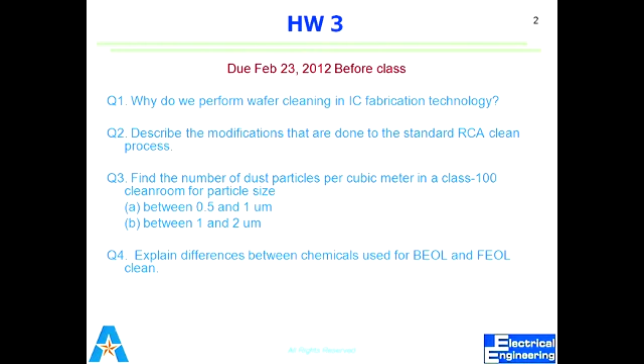In cleaning, the first rule, the AAA rule, as I told you in the lab, is that you always add acid. Always add acid is a very important rule for the cleaning process. Whenever you need to prepare a solution for cleaning, and one of the components is acid, you always add acid, so acid always goes at the end of the process. Keep in mind that you never add something to the acid, but always add acid to the other chemicals.

So there are actually two steps of the cleaning process. One is named FEOL, front end of line cleaning process, and the other is named back end of line cleaning, BEOL. As the name illustrates to a certain extent, front end of line means starting from the silicon wafer to the process where the first metallic deposition comes into account.

When you deposit the first metallic layer, make the first electrical connections, or maybe a bonding wire or metallic deposition, so before depositing the metallic layer on your device, the cleaning from the beginning to that step is included in the front end of line. After the metallic deposition, the back end of line cleaning process actually starts.

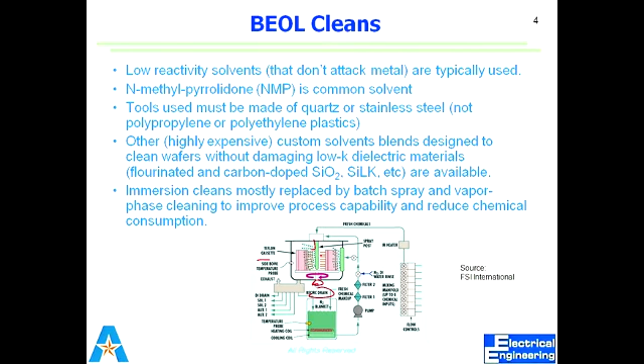One example of a back end of line cleanup process is a solvent clean. So in solvent cleanup, first of all we clean it in acetone, then in IPA, that is isopropyl alcohol, or maybe methanol, or even you can use all three of them as well. Then we rinse in DI water, then dry with nitrogen, so it removes the organics.

If somebody among you has been working with functionalizing the surface, means you are working with maybe DNA or RNA or some other things like that, you have observed that for the cleaning process, you follow this protocol. You spray acetone, then you spray IPA, and then DI water.

Mostly you repeat this process 2 to 3 times, so that you make sure that the surface is clean and you have not damaged anything. So they are not very highly reactive chemicals that we are using. It's just an example of organic cleanup in the back end of line process.

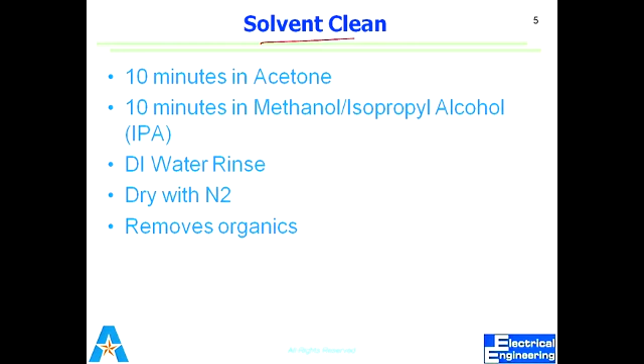Okay, as discussed in the lab as well, the piranha clean is mostly used for removing the photoresist residues, if you remember. The strips of photoresist need to be cleaned; this is one of the very critical steps when you are cleaning. You need to make sure that there's no photoresist residue.

Because when you are fabricating a device, it may happen that you are spinning the photoresist, you're patterning your film, and again you need to pattern another layer of some other material. So you spin the photoresist again, and it may happen again and again.

So that's why you need to make sure that before you deposit the next layer, you clean the surface and there are no photoresist residues from the previous photolithography process. So photoresist residues need to be removed. When do photoresist residues need to be taken into consideration?

After the etching process. Whenever you etch some surface, it means that you are actually patterning the surface, because photolithography plus etching is one way of patterning a thin layer. Do you know about the lift-off process or no? What is lift-off? Because I was talking about etching, I believe when you know about photolithography and etching, you should know about lift-off as well.

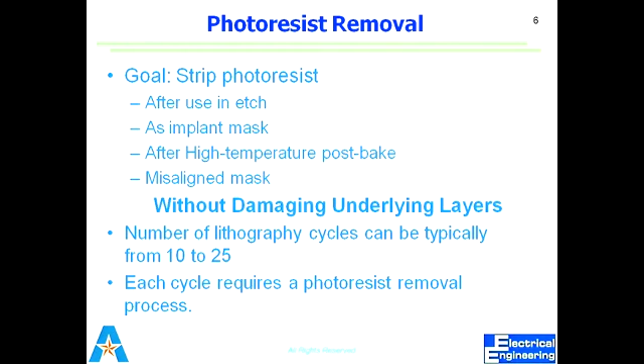Okay, so there are different types of photoresist removal. First is the oxidizing type. In this case, commonly named piranha solution. Different ratios of this sulfuric acid and H2O2 are used. Here H2O2 is actually the oxidizing agent. That is, it oxidizes the carbon in that photoresist to form carbon dioxide, and that escapes. And that's why it's easier to remove the photoresist if there are any photoresist residues.

But as I told you before, piranha solution cannot be used as an organic cleanup or for photoresist residue removal when you have a metallic layer. So it can only be used in the front end of line cleaning process, not in the back end of line cleaning process. Once you have a metal on the surface, you cannot use this piranha clean because it will damage your metallic layer. In the lab we use 3:1 if you remember for this piranha clean,

but some people use 7:3 as well, where H2SO4 is 7 and H2O2 is 3. So that's why I say different ratios are used for piranha clean, but even 1:1 is used. That's also good enough. Maybe you will have to heat it up. 3:1 is very hot, and 1:1 would not be, but you will have to heat it up to 95 to 180 centigrade before cleaning.

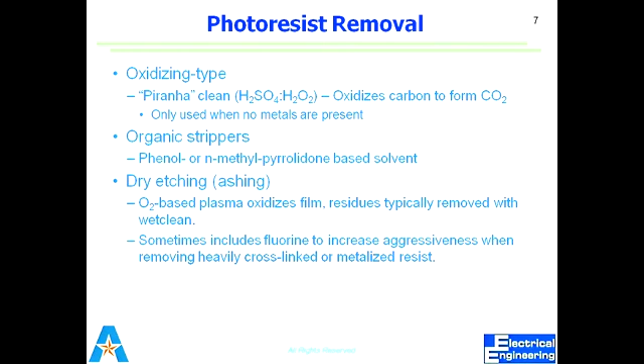Okay, so we are talking about dry etching. As I told you, oxygen or fluorine can be introduced as a reactive species when we are doing dry etching. What is the effect of oxygen and fluorine? They can increase the etching process. How they increase it is why you need to know about the H/C ratio and F/C ratio. Right now I am not going to talk about that, but you should know that adding fluorine or oxygen actually affects your etch rate in dry etching.

Do they act as a catalyst? Yes, that's why I say the important thing is actually the F/C ratio. Adding fluorine increases the F/C ratio, adding oxygen increases the F/C ratio. So this is the factor that is affected. When you talk about dry etching, you should know the F/C ratio and how it affects things, and you will see that the F/C ratio works differently for silicon and silicon dioxide. Because today we are talking about cleaning, not dry etching, I don't want to get into details. But when you talk about dry etching, you should ask the question about F/C.

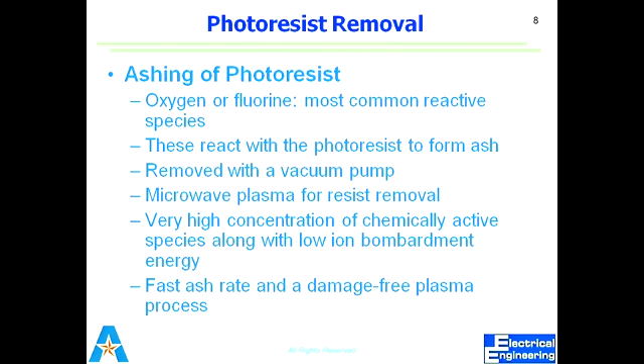Because for etching one material, you may have two to three gases available, but one gas reacts faster than the other. So the etch rate of every gas is different. So those are the three to four parameters you need to keep in mind when working with the dry etching process: the time, the concentration, the etch rate, and the energy or RF power. Yes, that is the power.

But you have good controls, and dry etching is a very simple process. You control which gases you introduce and the concentration or power of the gas. You can even use a mixture of two gases to remove any surface during the dry etching process.

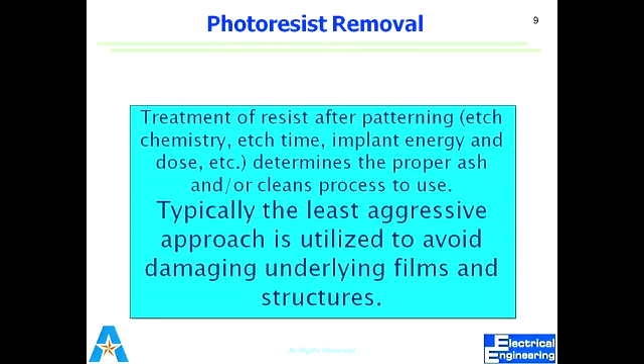Okay, because we are basically discussing the cleanup process, dry etching is also one of the processes used to clean the surface. As I told you, oxygen plasma is a very commonly known process to clean the wafer surface. The other ways we can clean the surface are named vibrational methods. We can use ultrasonic or megasonic waves.

With ultrasonic waves, in a liquid, which may be DI water or H2O2, we produce high energy sound waves. Due to those waves, bubbles form and immediately collapse. When the bubble collapses, you get a liquid-free space or cavity. So when the bubble forms and immediately collapses, there is a cavity.

Okay, so in this way, with the vibrations, you form and collapse bubbles, named cavitation bubbles. That cavitation is actually the process that makes the wafer surface clean. We don't touch the surface. Keep in mind that liquid is there.

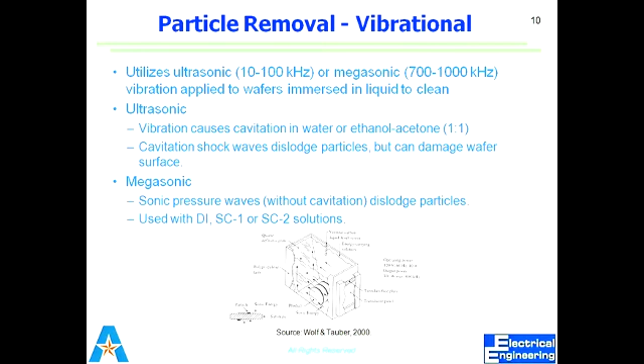After the vibrational process, there is another process named the scrubber. In this case, water or another liquid is supplied to the wafer surface, and brushes made of PVA, polyvinyl alcohol, are used to push the liquid along the surface of the wafer. Keep in mind that though the name sounds like it scrubs the surface, it does not contact the surface of the wafer.

The brush does not contact the surface, but it's very close to the surface, and it exerts some pressure through the liquid between the brush and the surface. It also causes movement of the liquid along the wafer surface from one point to the other. But it's not contacting the surface. That is one point I want you guys to keep in mind.

CMP again? Sorry? CMP? Oh, CMP is chemical mechanical polishing, or chemical mechanical planarization. At the end of the fabrication process, you go for CMP. Metallization and CMP always come at the end of a process.

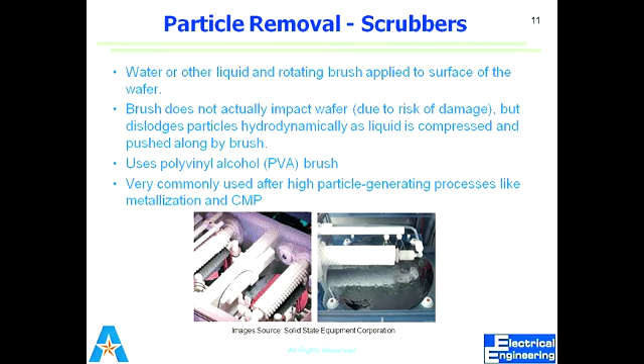Wafer rinsing and drying. So you know, always after cleaning we go for rinsing the wafer in DI water, and then we blow it dry with nitrogen. As for why we rinse the wafer in DI water: after that particular chemical has done its job, we want that chemical to be removed from the wafer surface. We don't want that chemical to be on the surface, so that's why we rinse it in DI water.

DI water is deionized water, very high resistance water, so it does not have any contamination, and it removes that chemical. For example, after piranha clean, if you rinse it in DI water, any sulfuric acid or hydrogen peroxide that was on the wafer surface is removed due to this rinsing process. There are different ways the rinsing can be done. First of all, one is named overflow rinse.

In this case, you have a tank of DI water and you put your wafers in, just like we did in the lab, but that is not actually the designated tank. We used a beaker as a tank of DI water, but in the fabs you have tanks of DI water. At the bottom the water keeps on going out of the chamber, and on the top the water comes in.

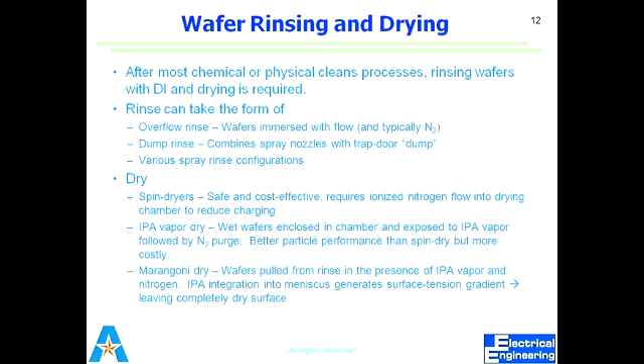It's also time consuming because it's slow, you need to take it very slowly, but it gives you another way to get your wafer dry. Due to that gradient of the surface tension, because IPA is at higher concentration at the top and lower concentration at the bottom, the water pulls the water towards its volume.

Watermarks, as I told you, if you remember when you were taking your wafer out of that quartz boat, if you blow it dry, it was not at all very clean, the surface was not clean. You were supposed to rinse it dry in clean DI water.

So that's why if the water is automatically dried on the surface of the wafer, you get water marks on the surface, and that is also one of the contaminations. So you don't want the water marks, you need to be careful that water marks are never there. Water marks can be there due to many reasons, but the exact reason why the water marks are there has not been completely understood.

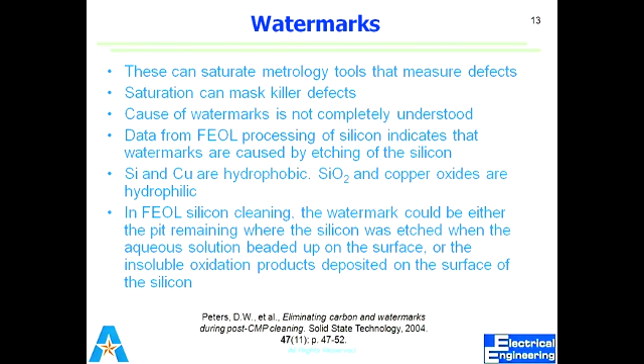But some people say it's due to some pits on the surface where water actually stays, and others say that water actually etches away that part where it stays. Watermarks is one of the contaminations, and you always consider that there should be no watermark if you want your wafer to be considered a clean surface.

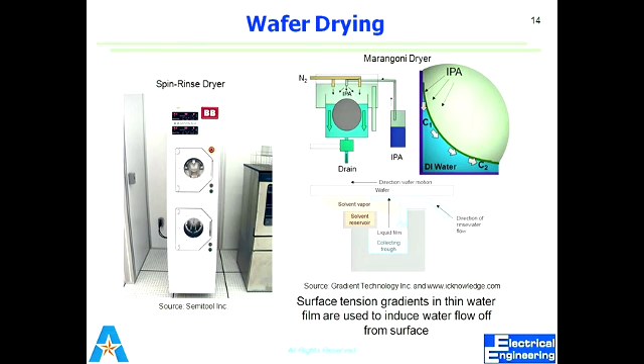Wafer drying, I believe we have talked about this. Spin rinse dryer, on the left side you can see it spins, and this is the Marangoni dryer I was talking about. Here IPA and water, there should always be an interface between the IPA environment and the water, and at this interface IPA concentration is more, so there comes a stress or surface tension. Due to that, the water always tries to pull the water towards its bulk volume, and the wafer that is getting out at very slow speed does not have any kind of water on it.

Contact angle and wetting behavior. Contact angle, do you know about the contact angle? Did you hear about that? Why do we use contact angle usually in research? Why do we need it? Adhesion, it's related with adhesion.

Whenever you need to make sure, in research you don't know, maybe you're depositing some polymer. You deposit the polymer, and after that you want to check whether this polymer is hydrophilic or hydrophobic. So in order to confirm the hydrophobicity or hydrophilicity of the surface or of any material, you go for the contact angle measurement. Contact angle measurement tells you about the hydrophobic or hydrophilic nature.

As you can see, in case A, the hydrophobic nature, the angle theta should be greater than 90. Why should it be so? Because if I have a surface and I get any polymer deposited on the surface of the wafer, this is a polymer. If this polymer is hydrophobic, for example, and there is a drop of water, because it's hydrophobic, that water does not want to get in contact with the surface. It tries to make as less contact with the surface as possible, so it tries to contract within itself.

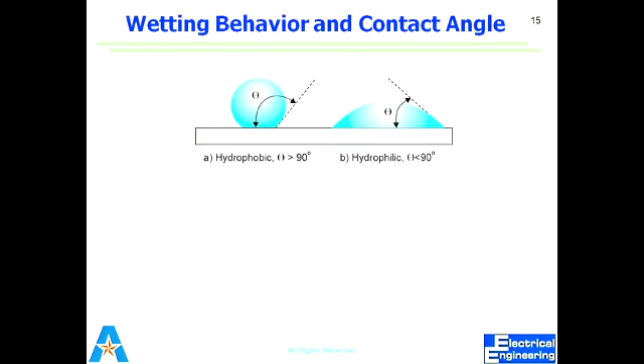So, the particle counter: in order to make sure your wafer surface is clean or not, we have certain equipment used to count particles on the wafer surface, how many contamination particles are on the surface. For that, if we have an unpatterned wafer surface, we use an optical laser striking the surface at right angle, vertically. If the surface is very clean with no particle at that point, the complete wafer is scanned with that laser.

Whenever there is no particle on the surface, the laser will come back vertically at the same angle, at 90 degrees, and it will not be detected by the detector. Whenever there is some particle, a contamination of any type, due to that particle, the laser will not come back at right angle, it will get scattered.

When light gets scattered from a particle, it is detected by the detector, which says here is some particle or contamination, the wafer is not neat and clean. The laser diameter is very small, so while scanning you can actually calculate how many particles are on the surface.

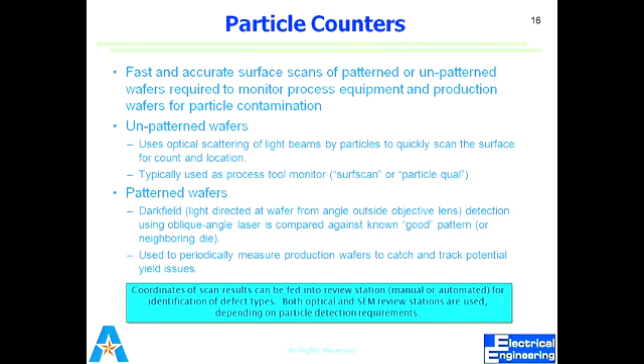So you need another technique for the patterned or rough surface. Instead of striking the laser at right angle, you strike it obliquely, at some angle. When it strikes the pattern, it comes back and is received by the detector at that oblique angle. After receiving the scattered beam, it compares it with an already known scattered beam pattern to determine whether it's the pattern or some other contaminating particle. If it scatters the same way as the known pattern in memory, it means it's not a particle, it's actually the pattern. That is how we calculate the number of particles.

Okay, so that was something about cleaning. Now we are going to talk about diffusion.

Just like oxidation, diffusion is also one of the very important processes. There are 5 basic processes in silicon IC fabrication technology. Out of those 5, diffusion, or ion implantation, we should actually call it doping. So doping is one of those 5 basic processes: oxidation, doping, etching, photolithography, and metallization. So these are the 5 steps.

Oxidation we have talked about. Photolithography, I believe we'll be discussing later. So doping is also one of the very important parameters, because doping actually affects all the other processes in fabricating the device.

Doping is done by 2 techniques, either diffusion or ion implantation: you bombard the ions and diffuse your dopant, or you go for the diffusion process. These are the 2 methods to introduce dopant concentration inside your silicon wafer. We are not going to talk about ion implantation today, we'll be talking about diffusion, but you should know that ion implantation can also be used to introduce the dopant concentration.

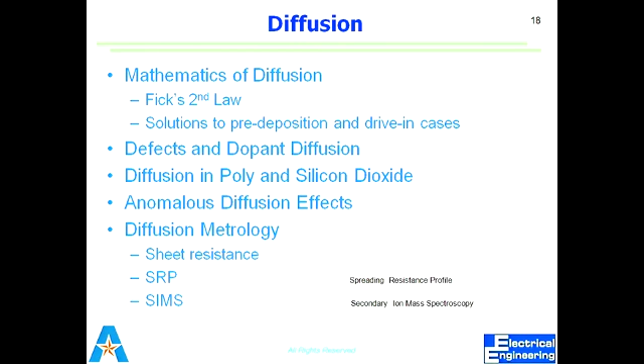And the other two methods used to find out the diffusion value are SRP, that is spreading resistance profile, and SIMS, that is secondary ion mass spectroscopy. All these topics we will be discussing later on. Introduction to diffusion.

What is diffusion? As I told you, the movement of the dopant inside your wafer is the diffusion: the movement of a chemical constituent due to the concentration gradient. In general terms, what is diffusion? Everything moves from higher concentration to lower concentration. Just like perfume: if I put some perfume here, it diffuses through the air, because it moves from higher concentration to lower concentration.

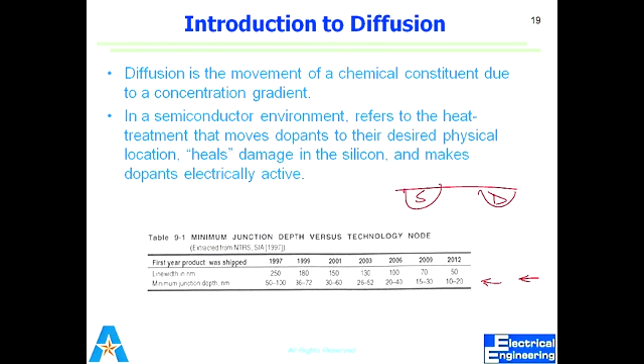Similarly, we introduce a high concentration on the surface, and after that it moves from high concentration to lower concentration at high temperature. So we say that we are activating our diffusing element. As I told you, at high temperatures the diffusion gets into the wafer more and more as we keep it at high temperature for more time.

The upper limit of that diffusion is the solid solubility of that dopant in that layer. There is an upper limit; you cannot put unlimited dopant in that specific structure. For example, the solid solubility of boron in silicon is the maximum boron dopant that you can introduce in silicon.

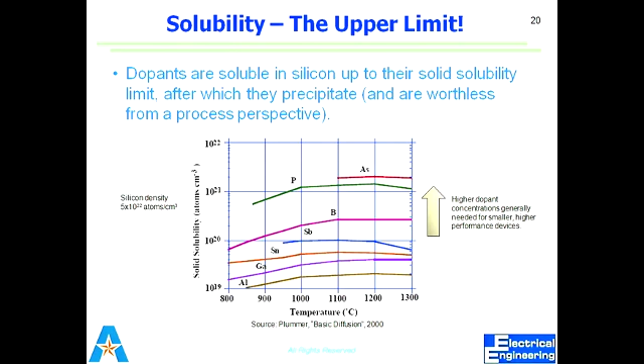Okay, because we don't have that much time, we'll be discussing the mathematics of diffusion later, but I can just give you a brief idea. In diffusion, first of all, there are two steps: pre-deposition and drive-in. In pre-deposition, as the name shows, you put your dopant on the surface. On the surface, you introduce your dopant.

You can do it in any way. You put it in a gaseous environment that contains that particular dopant in that gas, or you can spin on dopant on the surface. That is solid, and you can spin on dopant. This is what we'll be doing. We'll be doing spin-on phosphorus dopant on the surface, and this is pre-deposition.